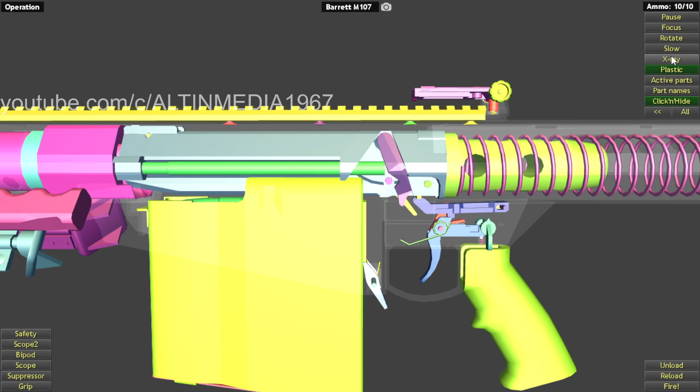So they're 10 centimeter longer. Is it 10? Yeah, no, not 10. It's probably 8 or 9 centimeter longer. Okay, so let's continue. So in my latest review of the Barrett M107 and the Russian 50 cal sniper OSV-96, a viewer told me that I missed the important part of the Barrett, which is this part here, the accelerator rod.

Okay, so I'm gonna focus on that first. Why am I clicking that? Okay, I'm sorry. Not that. This. Okay, so we can see it more clearly. I'm gonna probably remove the bipod as well. Okay, so this is very important in the working mechanism of the Barrett, because the Barrett does not use a long stroke piston or a gas system. In the Barrett the barrel itself moves under recoil to cycle the round. So this accelerator rod and accelerator are very important for this weapon to work.

Okay, so, I'm sorry, my nose. Okay, so I'm gonna fire it now in slow motion. Okay, maybe from here. Let's try it again. Firing. Okay. Okay, now let's see it. So I'm gonna remove the bolt carrier here. So you can see down here, this cam pin connected to the bolt. So I'm gonna fire it. Okay, it's troubling again. Okay, firing.

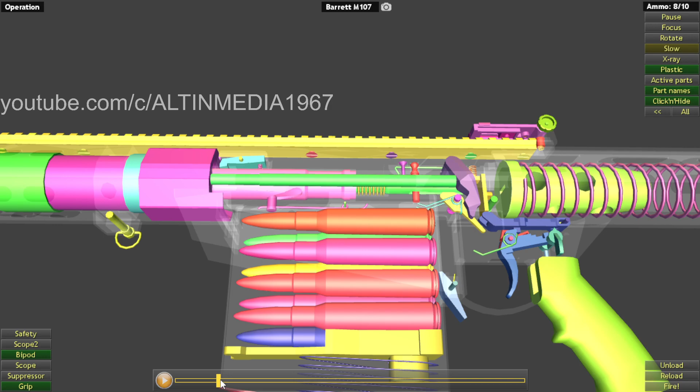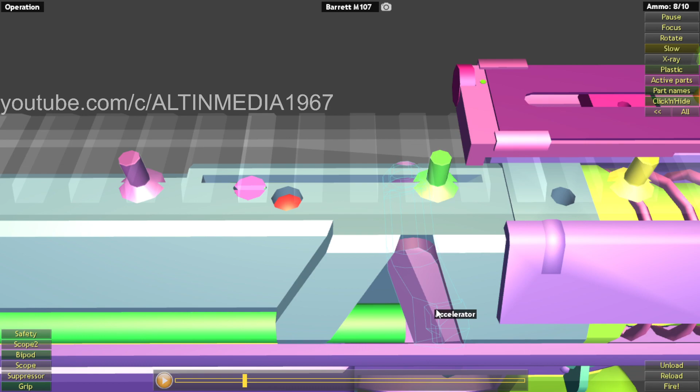You see, the recoil is pushing the barrel and the bolt carrier back, until it hits this side. This accelerator hits this part here in the lower receiver that will push this. Okay, what am I clicking right there. Okay, this accelerator will be pushed by the cutout in the lower receiver. So it's gonna punch the accelerator rod forward like that. So accelerator rod here and the accelerator here. It's gonna punch this accelerator forward to hit the barrel.

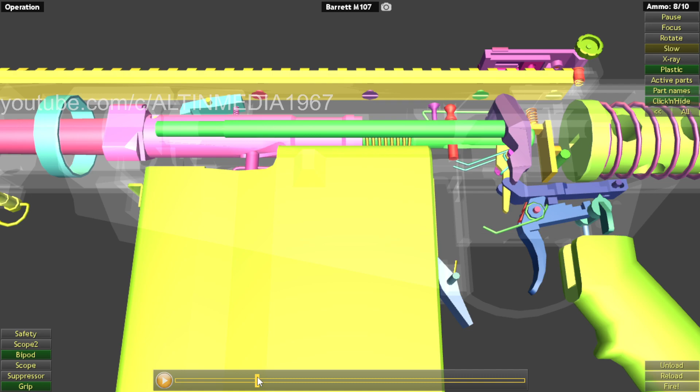So okay, you see. So it's gonna push the bolt carrier and the barrel apart from each other. When the bolt carrier here moves, of course it's gonna push this cam pin backward to follow this line here, the cutout in the bolt, allowing the bolt to rotate. So it goes like that from the recoil. And when the accelerator hits that stop in the lower receiver, it's gonna push the bolt carrier away from the barrel, thus rotating the bolt to unlock the bolt from the barrel, and then from the recoil energy, the bolt will go back.

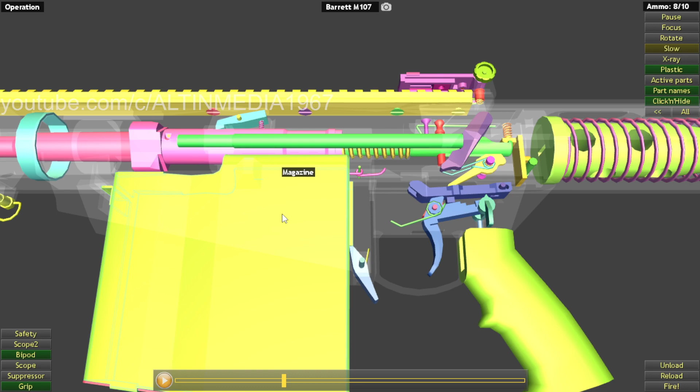Okay. So the recoil energy still exists, pushing the bolt carrier and the bolt backward, while this recoil barrel spring here pushes the barrel forward, absorbing the recoil energy, while the recoil energy that still exists in the bolt carrier here is absorbed by the mainspring behind. Okay, so when you fire, the recoil happens and both the bolt carrier and the barrel still stick together until the accelerator pushes them apart, to separate.

And then when the separation happens, there's a cam pin here that goes back and rotates the bolt to unlock. When it's unlocked, the separation happens here, the bolt carrier goes back, and then the barrel goes back into position. Okay, so like that. So that's how the cycling works in the Barrett, because it doesn't use long stroke or short stroke or a gas system, but it uses recoil from the firing of the weapon, and the barrel moving backward. So if the barrel stays in place, I don't know. What do you think? Is it gonna be unlocked or not?

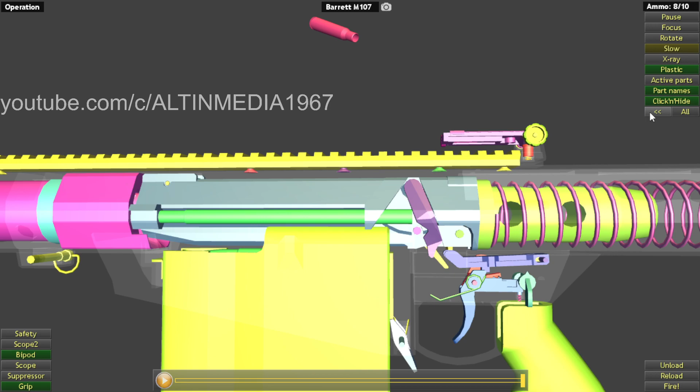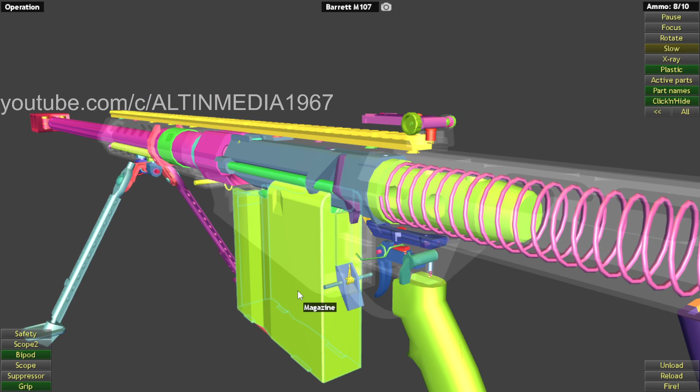Maybe in the future, if the developer watches my video, we can click to remove some part in the system, in the model, and then we test fire it, and then maybe a malfunction will happen. Okay, so this game is very good, but if we can have a simulated malfunction, that will be nice to see what not to do with a 50 cal.

Like, I know how dangerous it is after seeing the Kentucky Ballistics video. Okay, that's very bad for him, but he's fine, I think. They're making a meme about him. Put your thumb in your neck, you know. Holy shit. That was crazy, like a chunk of metal just entered his neck, man. Crazy, crazy. I guess let's continue.

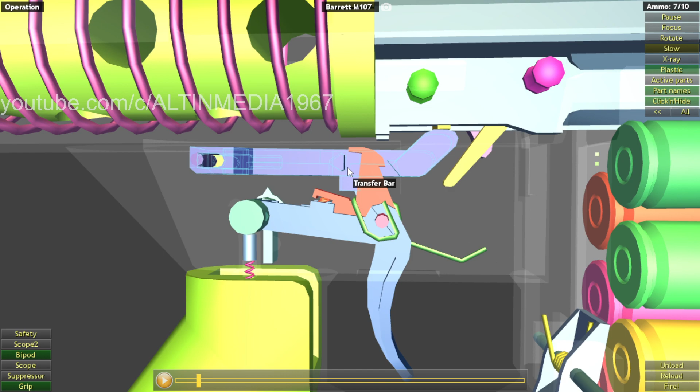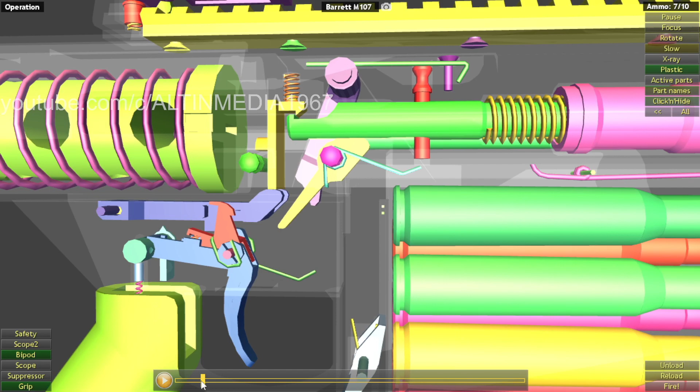Okay, let's continue. So because this is a remake, I'm gonna review this firing mechanism here. Okay, so as usual, you pull the trigger, and then this disconnector here. The transfer bar is sitting on top of the disconnector. So when you pull the trigger it goes up like that. The disconnector pushes up the transfer bar. The transfer bar pushes up the sear, and the sear is disconnected from the firing pin extension.

Okay, so this is like striker fire or similar to the M2 Browning. So push it up like that. Trigger, disconnector, transfer bar, sear. When you pull the trigger, those 4 parts move up, allowing the firing pin extension and the firing pin to hit the primer. Firing, and recoil happens.

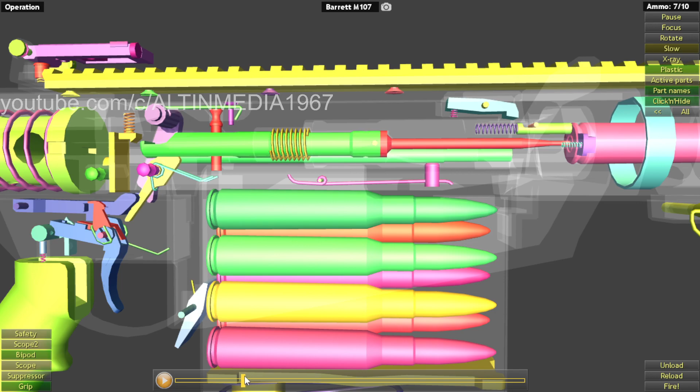And then you see here, the sear lever is pushing against the transfer bar. Okay, so it goes down. The transfer bar is pushed down on the disconnector by the sear lever, and then it stays down there. The disconnector is holding the transfer bar. So watch it carefully. Firing, recoil happens, then the sear lever pushes down the transfer bar, and the transfer bar is caught by the disconnector. The recoil continues.

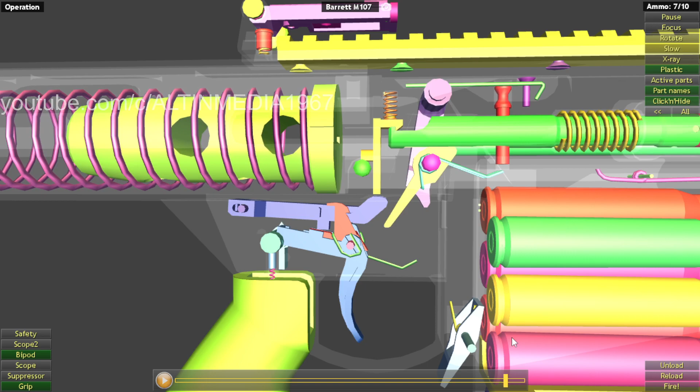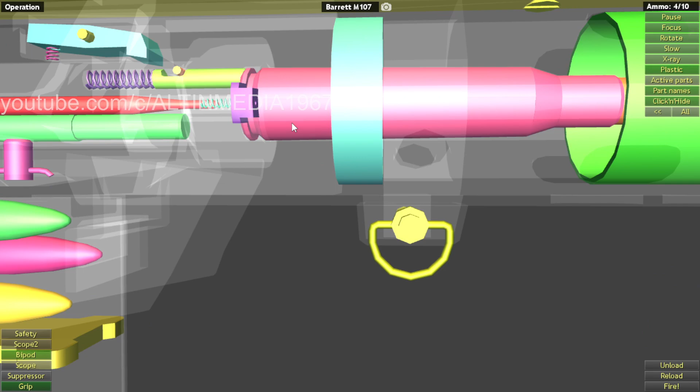And then you see here, the sear lever is pushing this firing pin extension to connect again with the sear. Okay, you see, right there. So from the recoil, pulling back the firing pin extension, the sear catches the firing pin extension, and now it's reset into position. Everything resets into position and is ready to fire again. Why is it firing again? Simple like that. Okay, so that's the firing mechanism here.

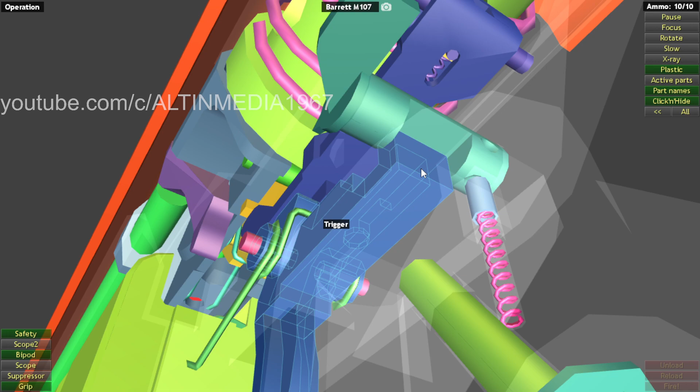Fire mechanism, and now safety. So the safety is preventing the trigger from moving. See that? Safety off. Safety on. Trigger cannot move. Safety off. Trigger moves, and you can fire the 50 cal. So that's the firing mechanism and then safety.

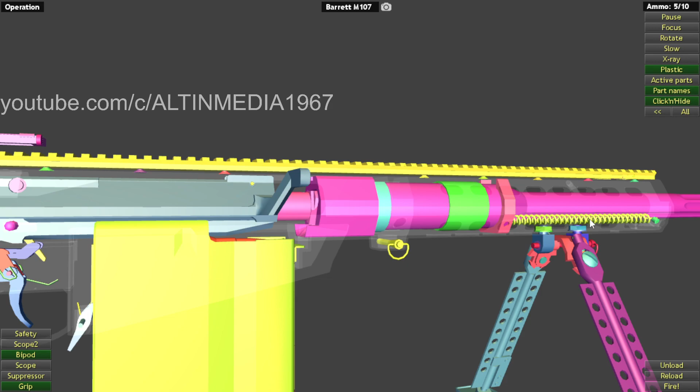Now what's next? Reloading. That's reloading. Okay, now I'm gonna do this. Unload. Really? The barrel did not move? What? The barrel did not move. But when I'm firing it, does it move? It moves. Okay.

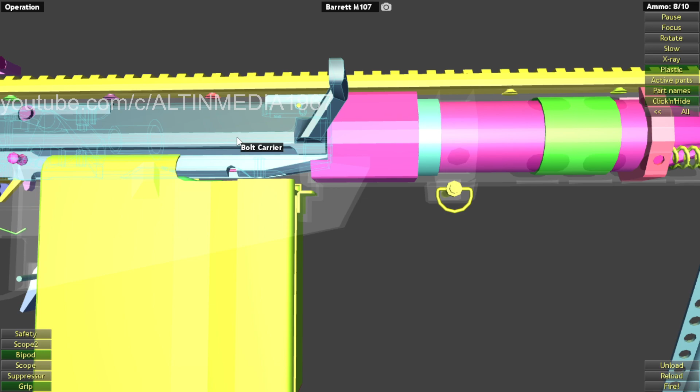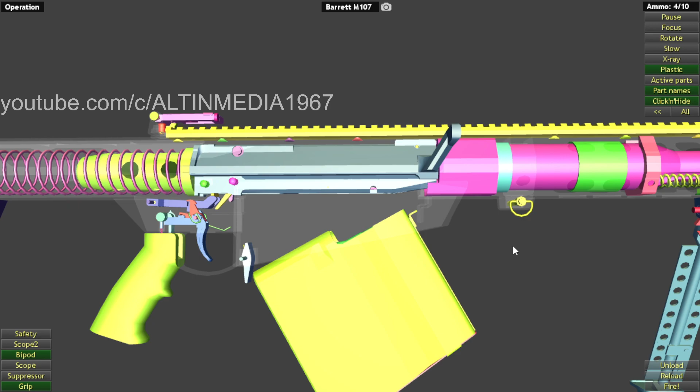I think when you unload, the barrel is supposed to follow the bolt carrier, same like this. When you unload it, the barrel is supposed to follow the bolt carrier, I think. And the next round like that. Maybe if you have a 50 cal, you can confirm. The barrel did not move when you unload. So reloading, unloading.

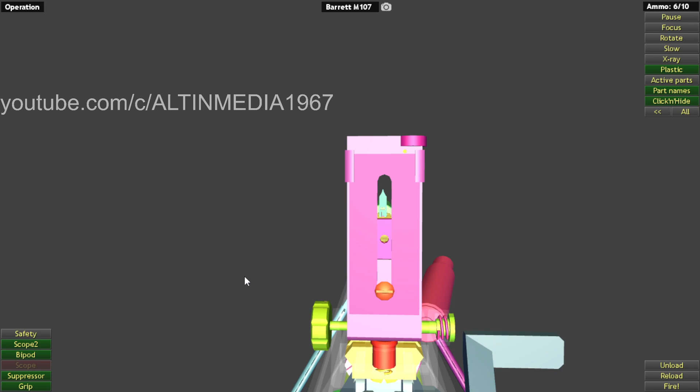Now suppressor. Now scope. This is not a scope, this is an iron sight. Okay, so scope one. This is the scope. Okay, firing. I guess that's it. How long? 19 minutes. That's very fast. Nice.